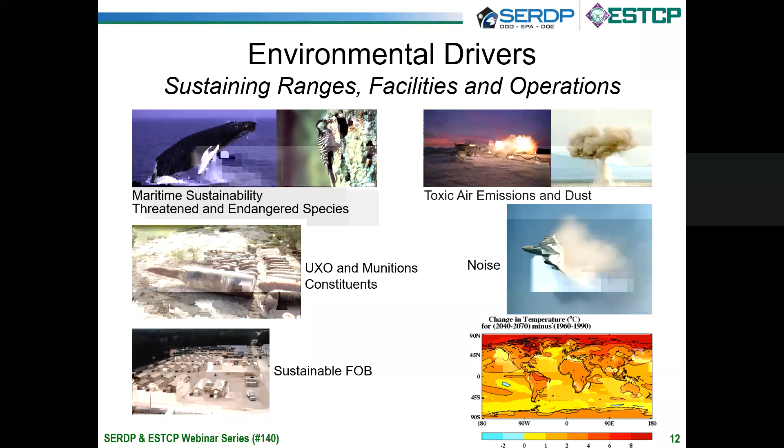We have a couple of drivers for the sort of work we fund. First is we are looking at the sustainment of our testing and training ranges, our facilities and operations, and this, as you can imagine, is very broad. It takes the form of looking at maritime sustainability, threatened and endangered species, climate impacts, unexploded ordnance and munitions constituents, as well as many other issues.

And then we also are looking at reducing current and future liability. Part of that is pollution prevention, where we're looking at the elimination of different pollutants or hazardous materials and their different operations on our installations. And then, of course, we also are dealing with contamination from past practices. This encompasses those chemicals in groundwater, soils, sediments. It also includes UXO liability. And then we're also always looking to the future in terms of what are emerging chemicals of concern that are coming out.

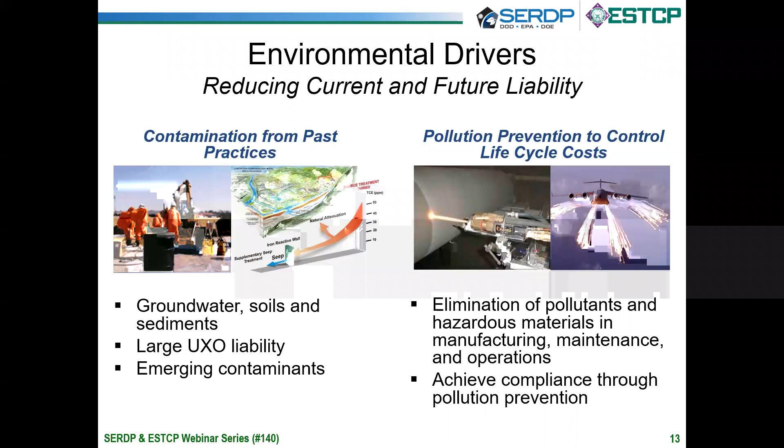We have several main focus areas shown here, and what I'm really going to highlight today is some of our work on PFAS and AFFF, which will be the topic of the presentations today.

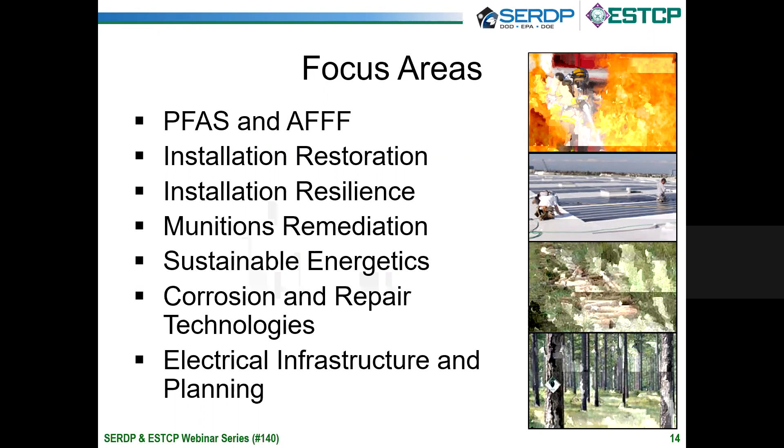Shown here is an overview of our entire PFAS and AFFF program, and I show it here really as a reference for you. We'll place the link to this website in the chat room in a second. This is an interactive graphic on our website, and above the date line shows all the different research areas that we've funded under SERDP.

Each of those research areas typically represents more than one project - it's a body of projects that were funded under that particular topic area. If you click on the box, it will take you to a page that shows more detail about what the research question was at that time, as well as the projects that were selected.

Below the date line, you'll see the ESTCP topics that were released. In this case, many of these are single projects, and you can also see that some are groups of projects by year. As we've progressed in our knowledge of PFAS, we've been funding more and more field efforts as well, so you'll see that in this graph.

Today we are focused on two different projects that came out of this program. It's a joint effort looking at a project dealing with PFAS treatment, as well as a project dealing with development of PFAS-free aqueous film-forming foams.

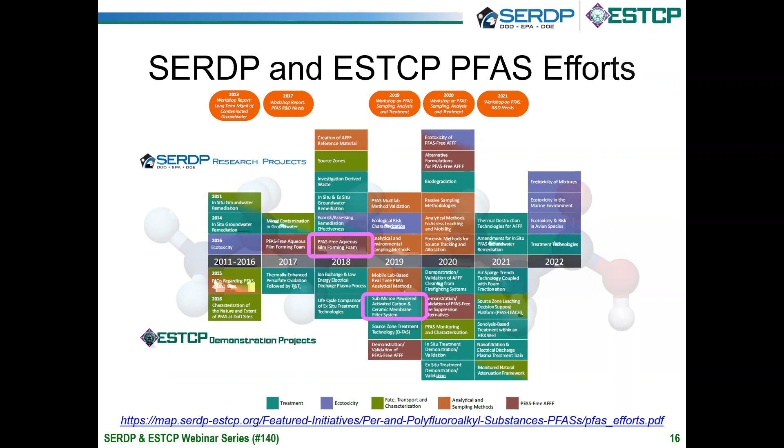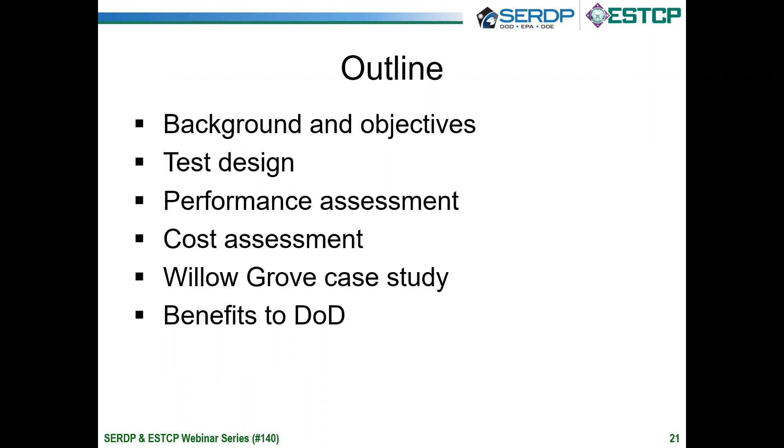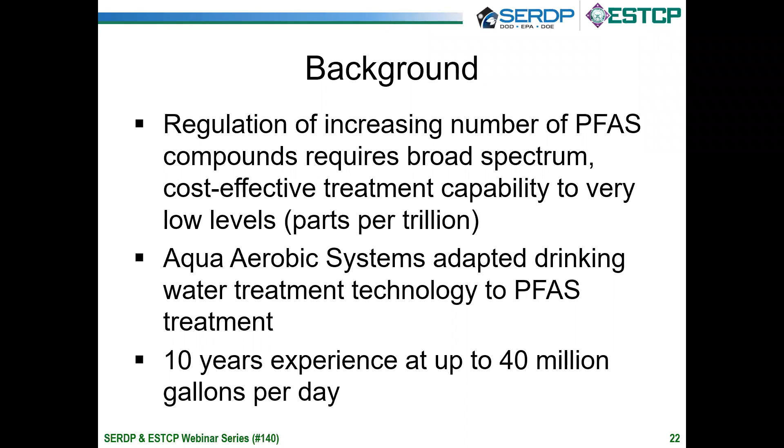Slide 22 covers the background of the submicron powdered activated carbon and ceramic membrane filter. It's a technology driven by increasing regulations of PFAS compounds and the need for broad-spectrum, cost-effective treatment capability at parts per trillion levels - that's really the big issue. Aqua Aerobic System, Terry's team, has adapted this technology from drinking water technology deployed in Japan. They've been using it on different contaminants for the last 10 years, in treatment applications up to 40 million gallons per day. So what they've done is taken this technology and applied it toward PFAS treatment, which is what we'll discuss today.

Slide 23 talks about our key performance objectives. We have three that we've met through our work at the Horsham Air Guard Station: treatment, longevity, and selectivity. We want to cost-effectively treat PFAS and make sure we can treat not only PFOS and PFOA, but a broader spectrum. To measure that success criteria, we're looking at those two compounds as well as the six compounds in the UCMR3 list, working to get below 70 nanograms per liter.

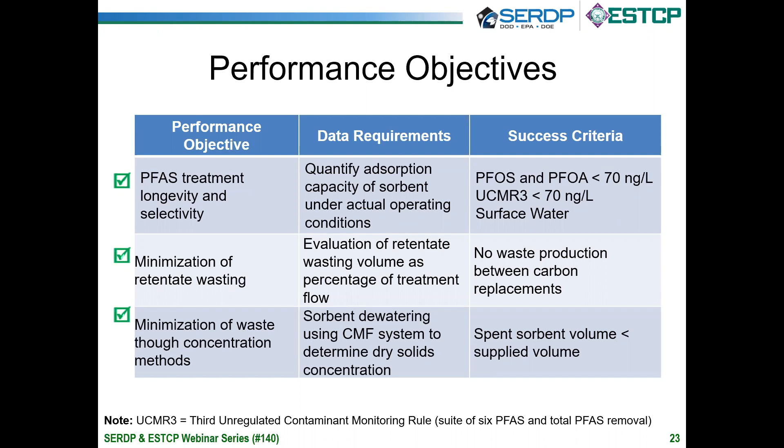Because the SPAC system uses a reactor, we're trying to minimize the retentate wasting for the spent SPAC, ultimately minimizing the waste. That last objective makes the technology very cost competitive by minimizing waste through concentration of the spent SPAC, dramatically reducing costs of waste management and disposal. Ultimately we're able to super-concentrate the SPAC after it's spent, leading to very cost-effective application. On slide 24, I'll pass the baton to Terry.

Thank you, Joe, and good morning, everybody. The results we're presenting today reflect testing conducted over a 12-month period starting July 2020. The technology centers around a carbon-based sorbent material we identify as Aqua PR206.

It's a superfine colloidal suspension managed in a slurry form. It's been generically termed superfine powdered activated carbon, or SPAC, but in this case it's been specifically formulated for the application we're about to discuss, and you'll see some differences between how it may have been used in water treatment versus what we're doing with perfluorinated compounds.

The general process flow of the technology is depicted on the right. Items 1 and 2 on the left-hand side are pre-treatment units - one a strainer, one a cloth media filter - used when drawing water with elevated sediment or suspended matter. Otherwise, if pulling from fairly clean groundwater, pump 3 takes the untreated water and pumps it to item 4, the sorbent reactor. That reactor maintains a suspension of the Aqua PR206 sorbent material anywhere from maybe 1 gram per liter up to 80 grams per liter, where the contact happens and the PFAS is adsorbed.

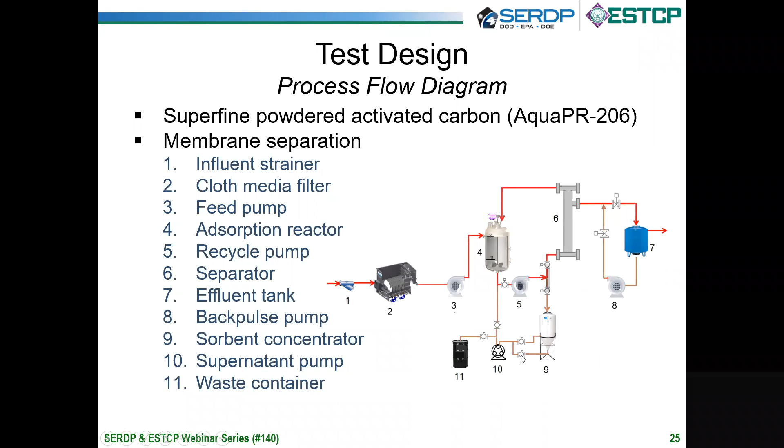The units shown on the lower portion of the screen, 9, 10, and 11, are used for concentrating the sorbent before disposal. Unit 9 concentrates the sorbent material; the water taken out of that is pumped back into the system for treatment. Meanwhile, the thickened sorbent is stored, and at some point ultimately disposed of, as depicted here with item 11.

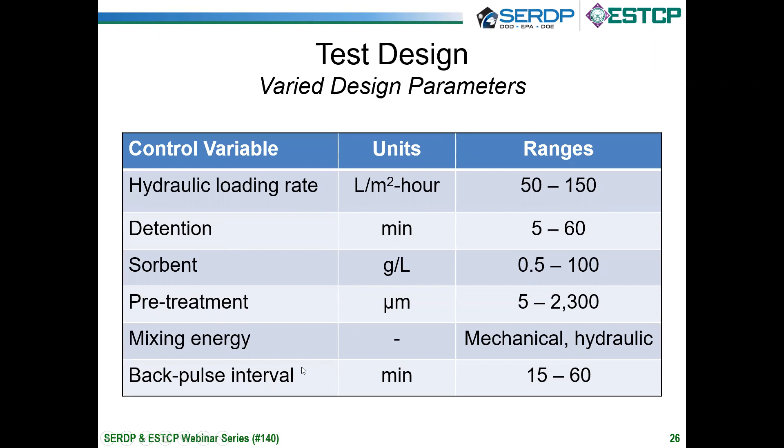Over the 12-month period, we performed over 26 different tests, and we looked at key performance indicators or variables that would influence PFAS removal, including the hydraulic loading rate to the system. Detention time was a critical factor, along with sorbent concentration, where we differ a bit because we're looking at anywhere from 0.5 to 100 grams per liter, not milligrams per liter. So this is a significantly concentrated material we're maintaining in that reactor. Up front, we considered pre-treatment and its impact on performance. We also looked at mixing energy and methods of improving performance, and finally the back pulse interval and how we can maintain reliability with the separation system.

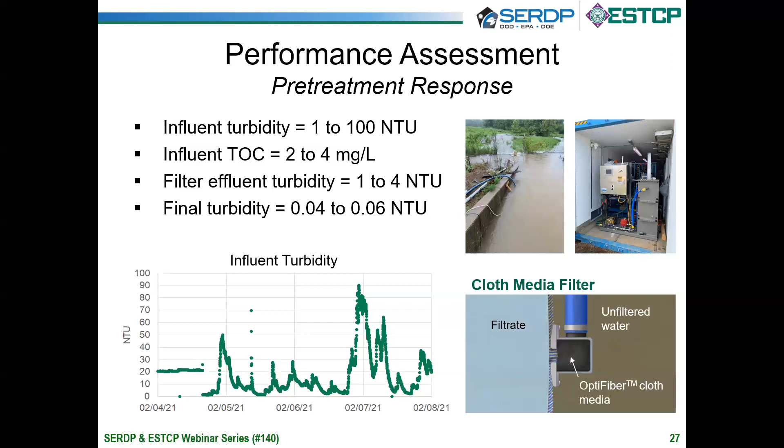We did evaluate PFAS removal across this system, and pre-treatment really had no impact on PFAS. So it was really an opportunity for us to optimize the performance of the downstream system. One thing to keep in mind is that because of this very tight separator at the end of the process, despite what's happening to the influent conditions, the effluent is pretty high quality in terms of final effluent, somewhere in the 0.05 NTU range.

And so we took this 26 tests and we grouped them into 3 different conditions. We'll start with test condition A, which is a single pass operation. We're moderately high on the hydraulic loading rate, but more importantly, we focused on a short detention time, in this case 5 minutes, and a moderate concentration of sorbent of 40 grams per liter. Moderate being something that could be as high as 100 grams per liter.

This is the characteristics of the feed water over that test period. The total PFAS was about 8,000 parts per trillion, predominantly made of PFOS.

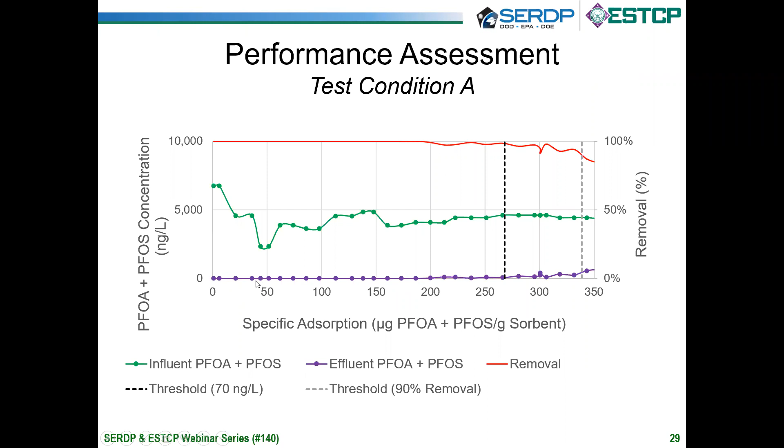What's interesting is that we were actually able to load the sorbent to about 260 micrograms of pollutant per gram of sorbent before we reached the 70 part per trillion combined PFOA, PFOS level. Now, in comparison, and putting this in context, what we would have expected for granular activated carbon would have been down in this 6 to 10 microgram per gram range. So we indeed were seeing significantly higher adsorption rates in this testing.

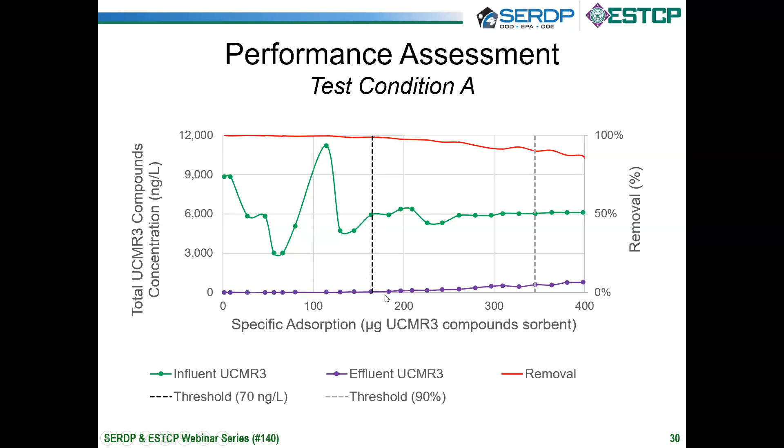But more importantly, as Joe mentioned, we were looking at broad spectrum removal of larger components and smaller chain compounds like PFBS and PFHxS. So we identified the UCMR3 compounds, those 6 compounds, as a good surrogate to identify how well the system was doing. In this test condition A, the concentration was somewhere between 3 and 10,000 parts per trillion, but averaged about 6,000. Again, we were at very low levels throughout the testing, not reaching 70 parts per trillion of combined UCMR3 until about 160 micrograms per gram. Meanwhile, if we looked at 10% breakthrough, that was closer to double that value, which shows us that we're not seeing a rapid drop-off in performance after we've reached a certain endpoint. So it's kind of a subtle change.

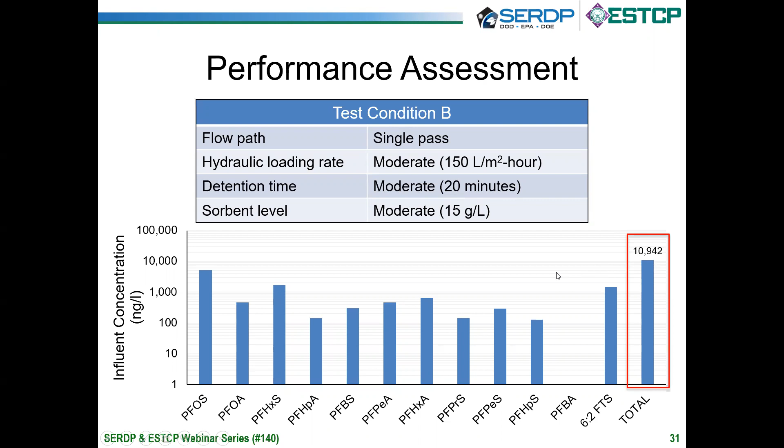So for test condition B, we made some changes. We looked at a longer detention time but a lower sorbent level. In this testing, we had slightly more stable feed quality conditions, but a little bit stronger, at nearly 11,000 parts per trillion. Looking at the combined PFOA and PFOS, the concentration was pretty stable at about 6,000 parts per trillion.

As a result, most of the samples were below the limits of quantification, up to 400 micrograms of combined PFOA and PFOS per gram of sorbent, where we hit the 70 parts per trillion level. Unfortunately, or fortunately, we terminated the test a little bit too early because we didn't see the 10% breakthrough point on the combined PFOA and PFOS.

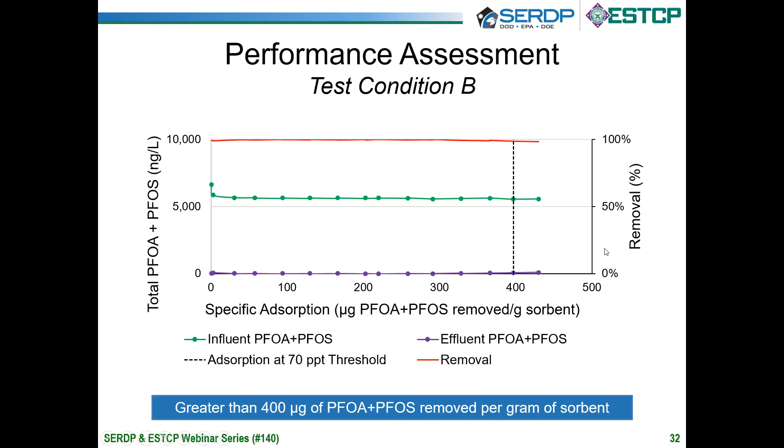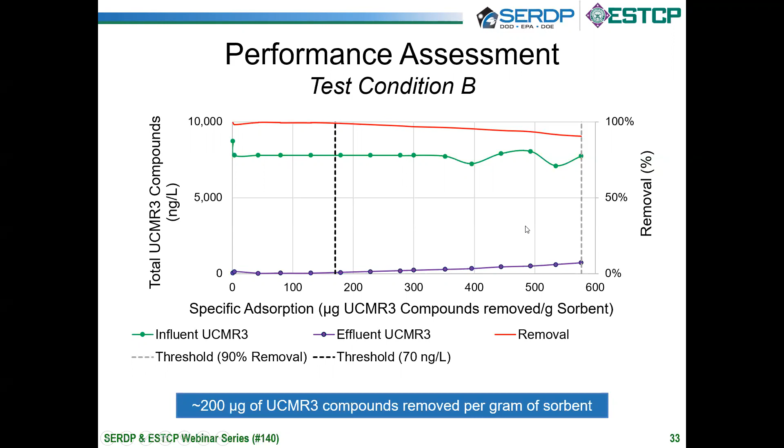So test condition C, during the final portion of the study, we ran a series of tests in a different configuration. It was in series, where we used 2 units, both with a short detention time of 5 and 7.5 minutes, at moderate concentration of sorbent. The objective of this testing wasn't necessarily to demonstrate high absorption rates, but to replicate practical application in the field, where we'd run 7 days.

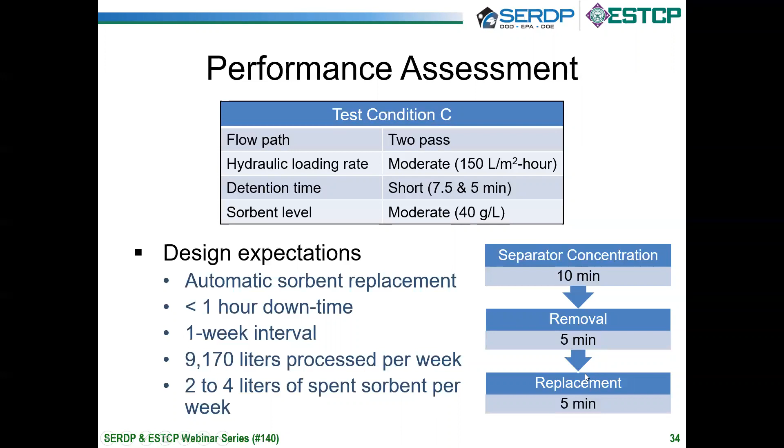Rather than waiting months to get to exhaustion, we would operate for 7 days and replace a little bit of the sorbent material. At the end of those 7 days, because it's a slurry, it allowed us to do some things with concentrating. So we would take the system, run it continuously for 7 days, and at the end take the system offline for about half an hour, where we would concentrate the sorbent, remove it, replace it, and put the system back online.

In terms of performance over the 7 days, this graph is pretty much the same as we saw before, except we're looking at the 7-day operation. The UCMR3 compounds were about 5,000 parts per trillion and below limits of quantification throughout most of that testing. We started to measure some towards the end of that 7-day period, but got nearly 100% removal over that time period.

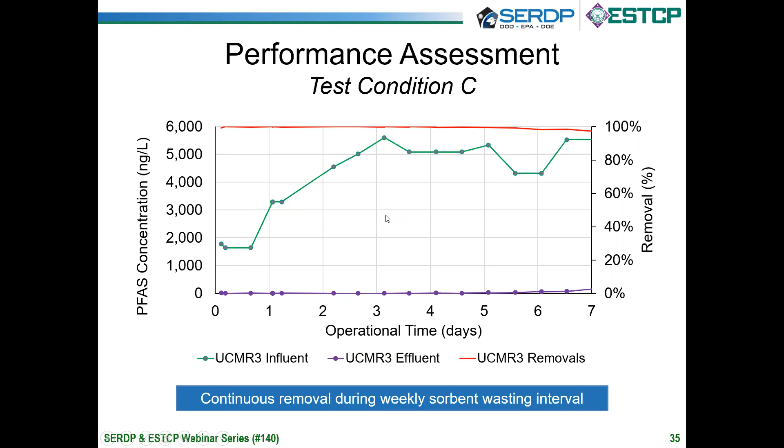And so that was interesting from a performance standpoint.

However, we wanted to compare, as Joe mentioned, part of the program was to evaluate the economic considerations of the technology. In this upper graphic, we used the data gathered from testing at the Horsham Air Guard Station, and then ran a rapid small-scale column test on granular activated carbon on the same water. You'll note this is on a log scale, because if we used a regular scale, we wouldn't see the GAC absorbent rate.

As a result, what you see is that the absorption capacity of the superfine powdered activated carbon is orders of magnitude higher than what we saw for GAC. This pretty much mirrored what we saw in the literature, in that range of 2 to 3 micrograms per gram based on this particular water quality, where we were upwards of 2 to 300. This is based on the 10% breakthrough point.

So what is the ratio of the two? If the aqua PR 206 absorbent material and the granular activated carbon were equal, that ratio would be 1. So we looked at each of the 6 UCMR3 compounds and took the ratio of the absorbent capacity, and what you can see is that most of the compounds were at or above about 100 times increased performance capacity with this superfine absorbent material. In fact, the sum of all the compounds was close to 300 times greater than what we saw with the granular activated carbon.

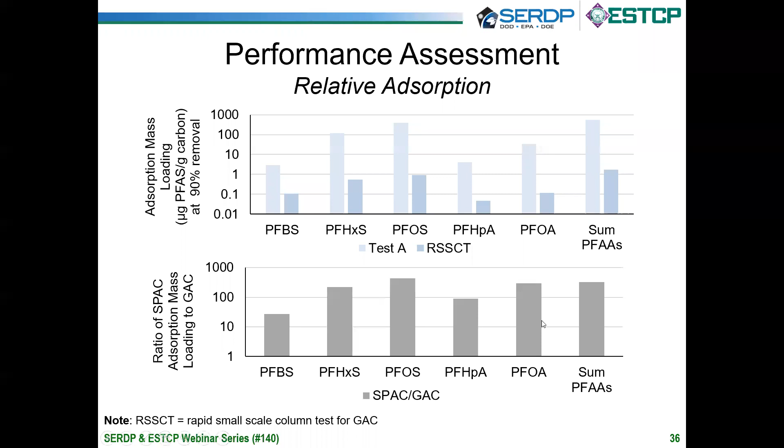There's one compound missing, that's PFNA, which was not actually measured in the influent, so we didn't include it in the graphic. A big part of the performance as well is waste minimization.

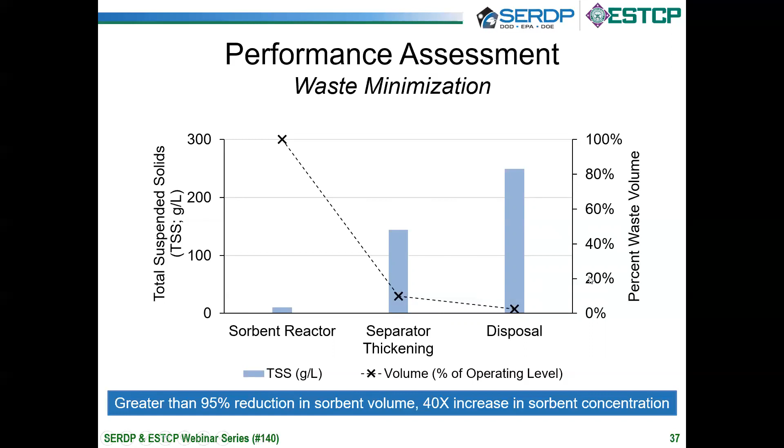This technology has a head start because the absorbent capacity is a couple hundred times greater than what we see for GAC, so we start with a much smaller amount of absorbent material. As we operate the system, we maintain a certain concentration in the reactor, but that's not what we actually dispose of at the end of the week. What we do is go through some thickening to the extent where what we're actually disposing is about 5% of the volume we're maintaining in the absorbent reactor. So we're really trying to limit the volume and mass of what we're disposing from the system, and that plays into the economic considerations pretty heavily.

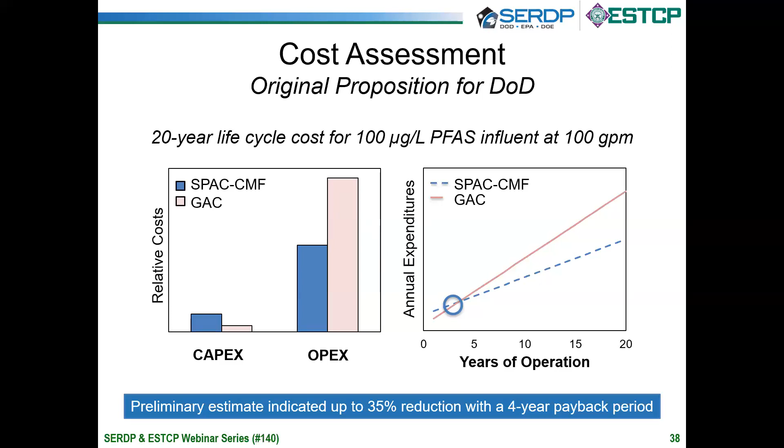Before, in the proposal stage to the ESTCP, we put together what we felt were the benefits to the DoD with regards to the technology. We looked at the capital expenditures we expected for this superfine powder activated carbon system versus what we would expect for granular activated carbon. We had increased capital cost by a factor of 2 to 3, but we felt the savings in operation and maintenance would pay for that difference in a short amount of time. In fact, in the evaluation of a 20-year life cycle cost, the payback period was about 3 to 4 years with this technology, based on a fictitious water using some estimated absorbent ratios.

So our goal was to, over that 12-month period, take the actual data we've compiled and compare it to the actual data gathered for granular activated carbon, and using the Horsham data, repeat that economic analysis.

When we look at the capital costs, not much change there. Our system is still a little more expensive from a capital standpoint, but a couple things happened in the operation expenditures. First off, our absorbent material performed a little better than what we proposed, and the granular activated carbon, I think in our proposal stage, we gave it a little too high an absorption rate. So this difference grew, resulting in a significantly reduced operation cost that produced a payback period of somewhere in the 3 to 5 months range, as opposed to 3 to 5 years. Again, this is based on the data we've been gathering over the last year.

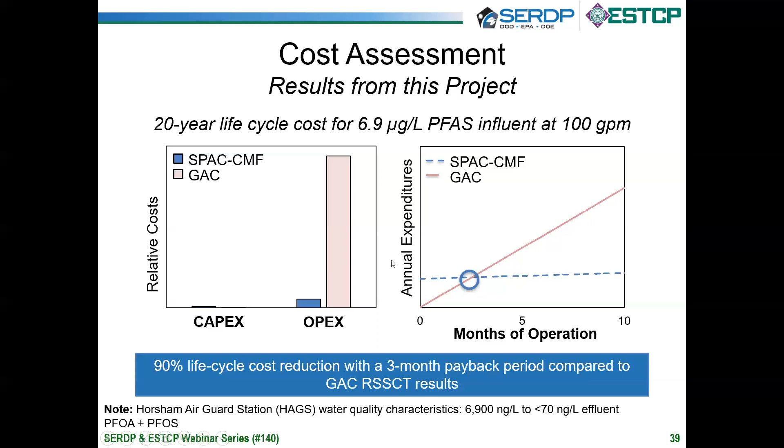As Joe mentioned, towards the end of the study, we had an opportunity to redeploy the system to the nearby Willow Grove Naval Air Station, where we could see how well the technology performed on groundwater as opposed to surface water.

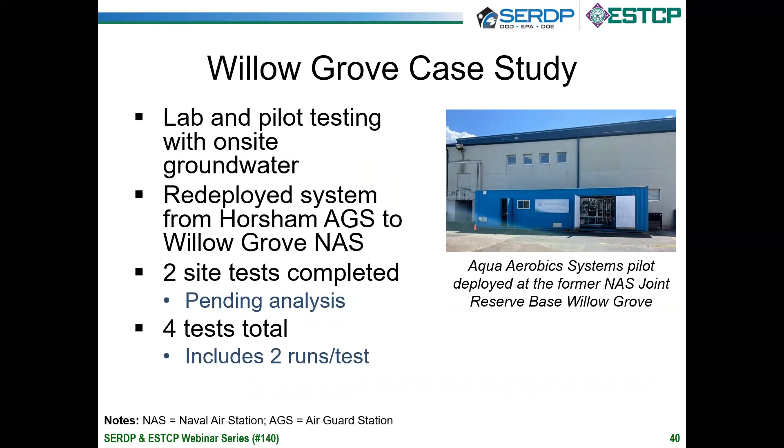One of the main objectives was to recognize that we're using the same production level absorbent, the same production level separator, and the same process flow diagram. What that would allow us to do in the lab on a short-term basis is have an accurate predictor of what to expect in the field.

So before we got on site, we actually received some water samples from Horsham, or from Willow Grove, and performed this testing in the lab. We found that the combined PFOA and PFOS was about 37,000 parts per trillion, and we were able to knock it down below the limit of quantification for the most part, up to about 1,200 micrograms per gram. That was 3 to 4 times higher than what we saw in the surface water.

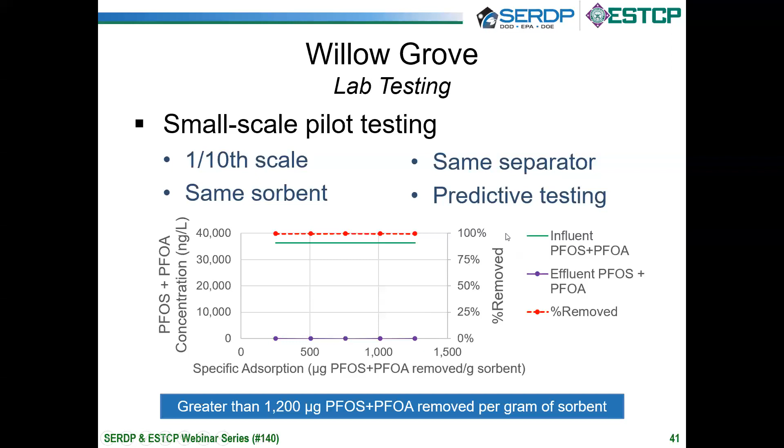So now the next step is to put units on site and see if that came true. We set up the first two tests in a similar fashion to what we did at the Horsham facility, with a moderate hydraulic loading rate. We used 2 units, one with 10 minutes detention and 20 grams per liter, and one with 20 minutes detention and 10 grams per liter. So same mass, just different detention times.

This is the makeup of the water that we saw during the testing, with total PFAS levels of 40,000 parts per trillion, predominantly PFOS.

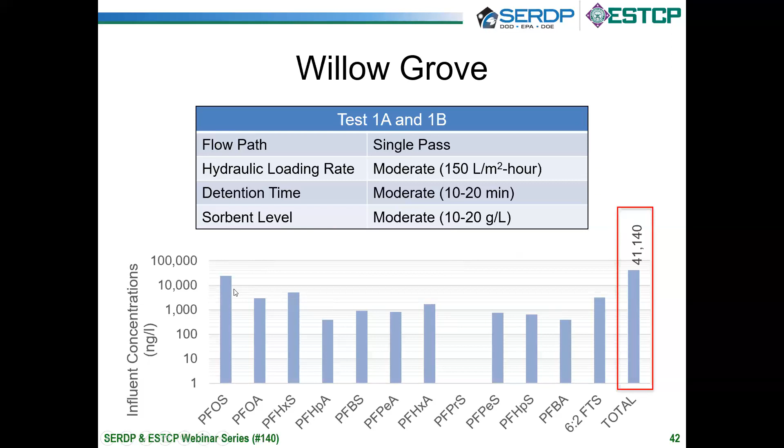We actually never saw any samples go above the limit of quantification. I suspect that had we had more sample, this would have been closer to the 1600 mark.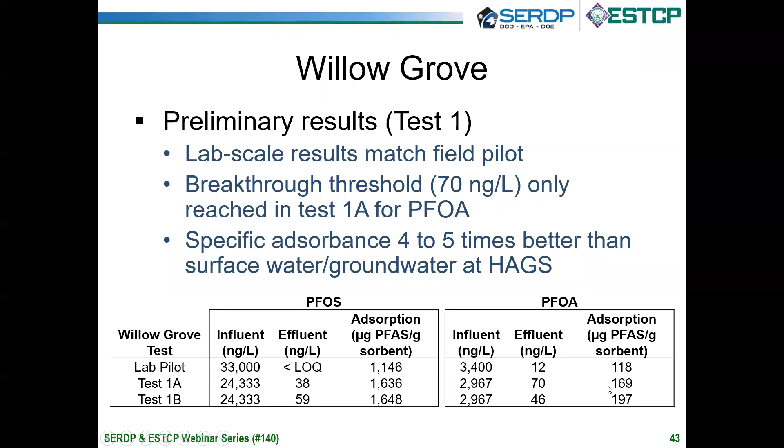PFOA, a little more difficult to remove, but at much lower concentrations. We had a similar story between 3,000 and 3,400 parts per trillion, down to less than 70, at adsorption rates of 170 to 200 micrograms per gram. And again, these were 4 to 5 times higher than what we're seeing in the surface water.

So in conclusion, the Aqua PR206 superfine powder activated carbon is superior to granular activated carbon. It's orders of magnitude more adsorbent than what we would see with GAC.

More importantly, in terms of what benefits it offers to, in this case, the Department of Defense, it offers significantly lower disposal and replacement costs where the operation expenditures are less than 10% of what we'd see with granular activated carbon. But some other side benefits is that it's an automated process that we ran by and large remotely.

In terms of absorbent replacement, we were able to do that in less than an hour and closer to maybe 30 minutes. Because it's a slurry, it allows us to use pumps, valves, and tanks and controls to replace the absorbent material automatically. And then a side benefit as well is because we're using that robust separator with a 0.1 micron barrier, that the effluent quality coming out of that is quite good.

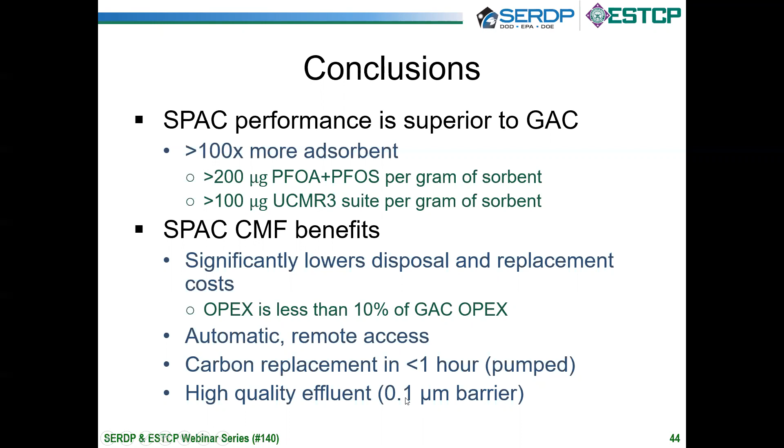So that concludes the presentation.

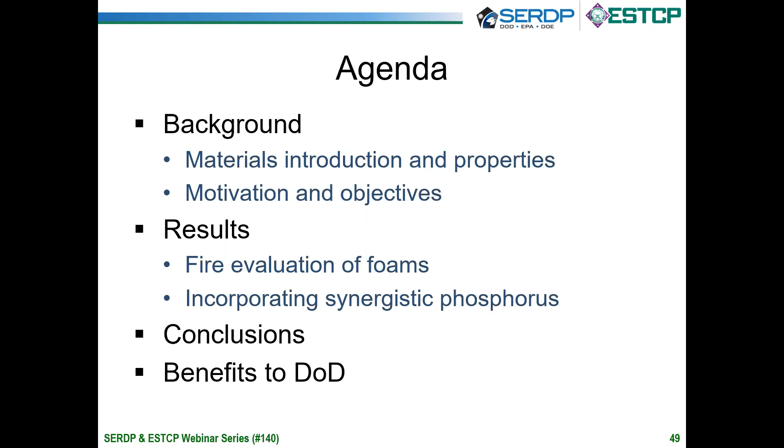I'll also show you some results of the polymers we designed, and we'll look at, in partnership with others, the fire evaluation—how do they perform? How do we scale the polymer up, and how does it actually put out a fire? That's really the key metric—at the end of the day, that's where the rubber meets the road. We also want to look at some other synergistic design parameters—what strategies can we take, what are some universal ways to think about the design of next generation fire suppression foams? So I'll conclude, and then I'll describe some of the benefits to the DoD.

So the first strategy that we chose was a polymer one, right? And again, as Jennifer mentioned, I'm a director of a polymer center here at Arizona State. So our first thinking is that, wow, polymers can solve this problem, right?

And the polymers that we choose were actually based on some earlier research, and we chose a fully aromatic polymer. For people who aren't chemists, in the yellow box, these are polymers that only contain these aromatic rings. In this case, this is a polyimide, and polyimides are really well known in commerce and commercial applications. The DoD, NASA, others have used polyimides for a variety of high performance applications - aerospace, automotive, medical, electronics.

Why are all these applications taking advantage of polyimides? Well, it's this fully aromatic character - it's all these kind of benzene rings that comprise the main chain of this polymer.

These polymers are also recognized for being flame resistant, fire resistant. Why is that? Well, they're fully aromatic, so they're not going to burn like octane, for example. So these fully aromatic polymers are recognized for their resistance to fire - they're flame retardant inherently in their chemical structure.

They're also resistant to chemicals - these molecules tend to be completely insoluble in organic solvents. And in addition to this resistance, they're also mechanically robust, and they have exceptionally high temperature stability, some of the highest temperature stabilities that are known in the polymer field.

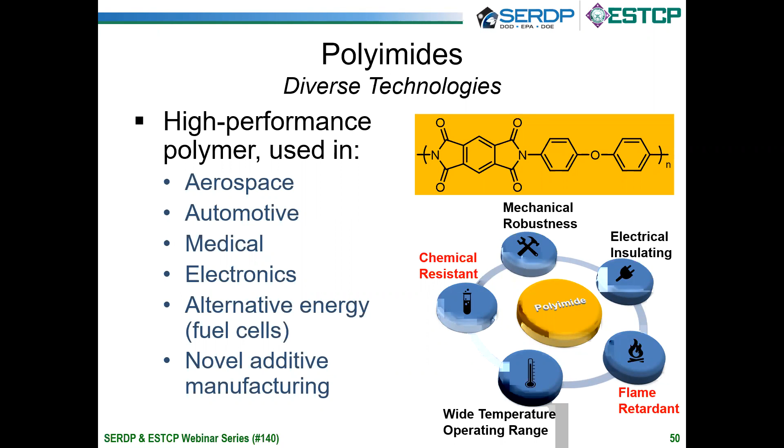So we're going to talk a little bit about the polyimide design space and why we chose them, and what are some of the potential advantages of a polymeric foam.

So the objectives for my lecture are first to show you how do we make a polymeric surfactant. What do we need to do? What are the considerations from the chemistry standpoint or from a scale-up process at a commercial scale? We're going to be looking at fully aromatic or all aromatic polyimides, and I'll show you a little bit more of that structure again - not to drill down too deeply into the chemistry, but to give you a sense of why we're choosing these, and maybe some of these approaches can be extended to other systems.

We also want to demonstrate an idea of cross-linking. As we suppress a fire, one of the major challenges is to not let any fire foam suppression agent migrate into that waterway that we just looked at. How do we do that? Well, polymeric structures are going to be less diffusing, and polymeric structures have high molecular weight by definition.

So we're going to talk about even cross-linking, or during the fire itself, using the fire to induce even a higher molecular weight or a less propensity to migrate.

And we're also going to explore various pendant sulfonates. We're going to look at the sulfonate group, and sulfonates, as we'll see, are widely used in surfactants - that's the S that we're all very comfortable with. But how we place those onto a polymer structure in order to impart foamability and tailor that fire performance - that's really the challenge of some of the efforts together with SERDP.

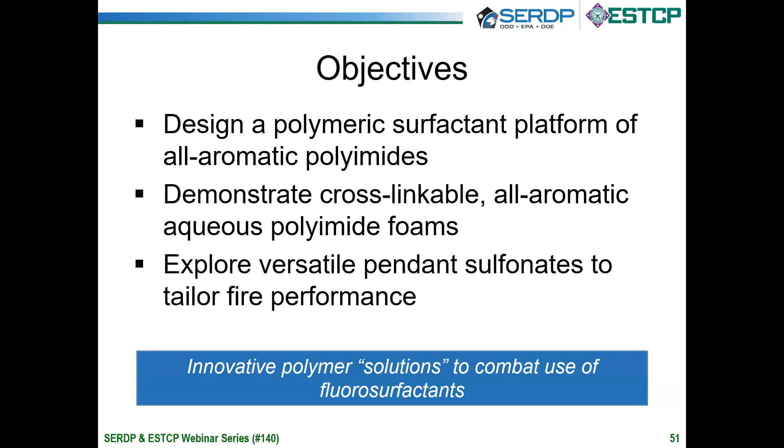Now, these properties are fantastic, but they're not going to form a foam - they're not going to be dispersible in water, form a foam in water. So we immediately have to take this idea of a high performance polymer that forms incredible char upon burning, and no migration - how do we render that polymer soluble or dispersible or foamable in an aqueous medium? So typically the way we're going to do that is we're going to introduce these sulfonate groups.

The other important feature for polyimides is the fact that they form high char yields. What's a char? After we heat that up, do the molecules all vaporize upon heating, or do they essentially form a high molecular weight carbonaceous char that also serves to help suppress the fire or to suppress any type of oxygen ingress into that system?

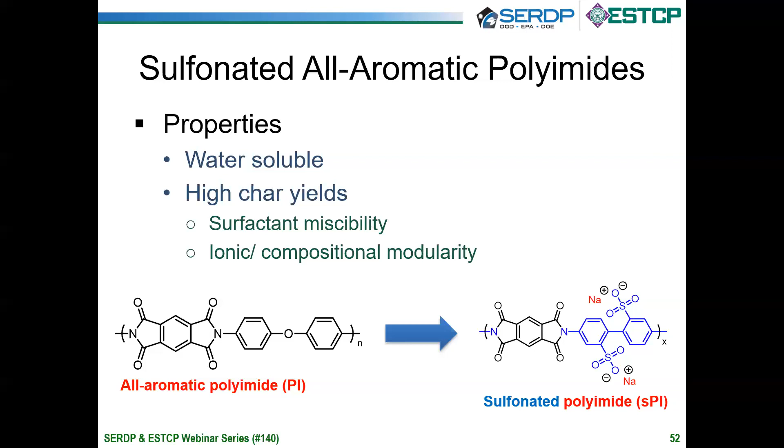So highly aromatic polymers have been widely used in aerospace applications, automotive applications, for these very reasons. But they have not seen use in the suppression of fire and foams. So let's get into a little bit of that kind of technology together.

The first thing to do is to leverage a commercial process. Even though SERDP is dedicated to fundamental science and engineering, looking for fundamentally new solutions, we still want to have a lens of commercial impact or commercial viability. So the first thing we did was to demonstrate that these polyamic acids, or this PAA, can be easily synthesized at room temperature. Why is this important? Well, we want to make these molecules in a commercially viable way, not using a lot of energy, and we'd like them to be affordable.

And then what we need to do, and what DuPont and Sabic do, is they imidize this structure at very high temperatures. At first glance you're going to say, wow, that doesn't seem very feasible, we're heating to 400 degrees C, that can't be a commercially viable process. Well, it is - there's many products based on that approach, but we're going to remove that constraint a little bit later in the lecture and show that now we can look at materials that are much more easily manufactured at scale.

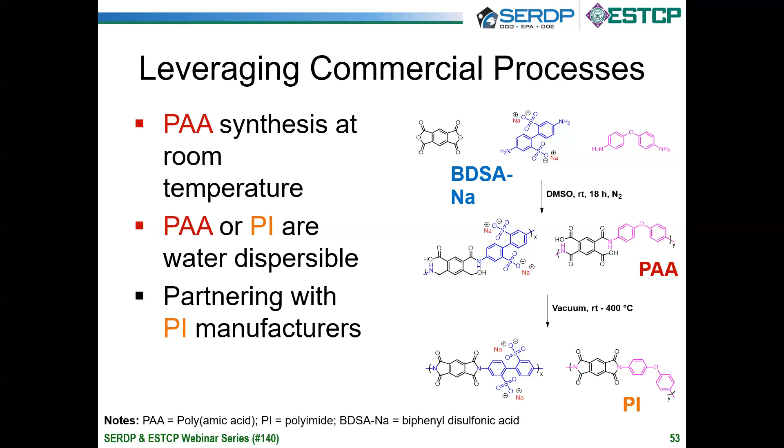So the main message for this particular onset of our strategy was: let's take advantage of fully aromatic polyimides, but let's also take advantage of existing infrastructure commercially in the United States. Let's take advantage of reactors that exist and processes that exist so that we can actually translate this technology into a commercial product, one that the DoD and other agencies can use.

We also like the char because we don't want small molecules coming out of the foam. So we prefer, as we see high temperatures in the foam, that these molecules are essentially tied into a carbonaceous product at the end of the day, and they're not vaporizing into the air and potentially harming people that are around that fire scene.

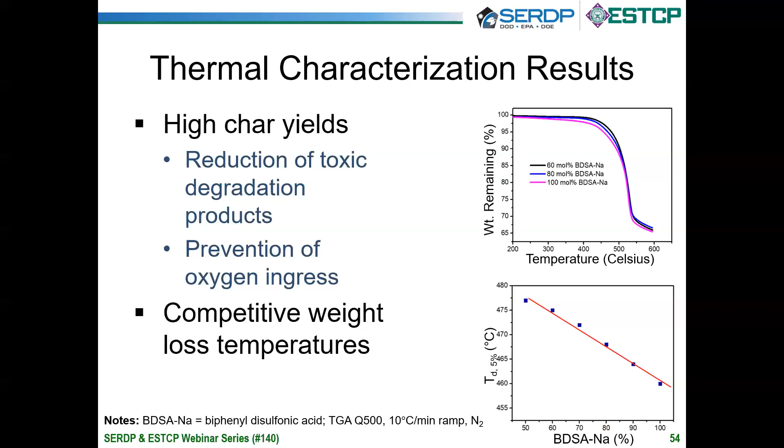So we're not compromising the thermal stability of these polymers despite introducing hydrophilicity and dispersibility into an aqueous media. That's a really good, promising result for us.

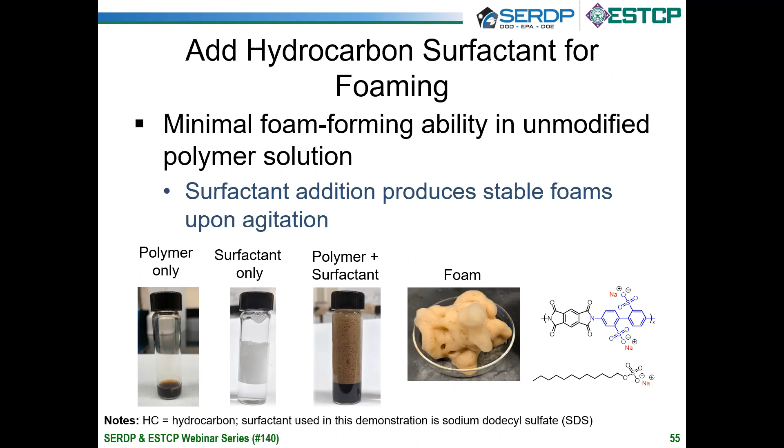But these form very nice foams at the concentrations that are typically used in firefighting, and we'll talk about that in a moment. These foams are stable. We can look at them. They can sit on the bench top, and they form quite readily. So that's a really good metric for success in this initial screening kind of exercise.

We can also spend a lot of time looking at the foam, and I don't think a lot of people are doing this. This is an area that SERDP has been encouraging: to fundamentally understand what is the foam, and how does the foam microstructure influence fire suppression. Lots of really critical fundamental questions in that space.

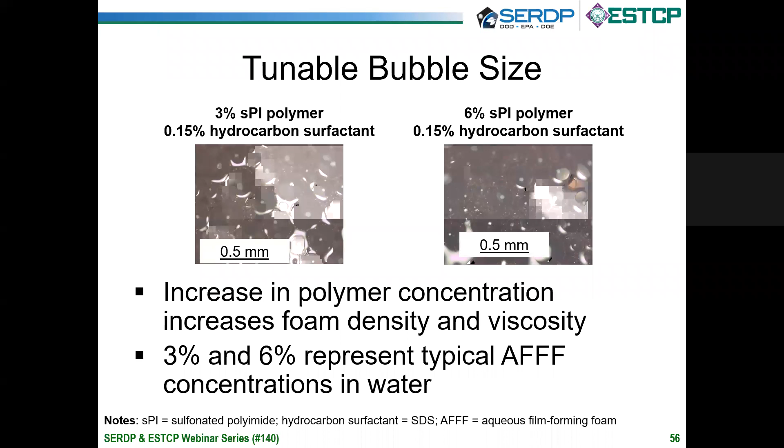What we also showed is that at the 3% and 6% levels, which is very typical for an AFFF kind of solution concentration in water, these will form foams. So we don't need to use more. We probably could use less, but at this early stage of research, we want to demonstrate at least that we're meeting the benchmarks of current products.

So let's test the foam. What's the biggest challenge in that? Making enough of that polymer to test. So in collaboration with Jensen Hughes, fortunately Brian Lattimer at Virginia Tech, great colleague and a former employee at Jensen Hughes, is on our team.

We can take a scaled-up production of these sulfonated polyimides and spray them onto this vertical substrate, and we can look at expansion ratio and drainage time. What we discovered was that, using this mil-spec nozzle and these mil-spec specifications, we could reach them—we're in the right ballpark. The biggest challenge here for synthetic chemists or people working in the laboratory is making it at scale.

And again, why did we go with those commercial processes? We did that to make these at scale, because we knew down the road we can't make milligrams of a product—we need to make hundreds of grams of a product, which is critical if we're going to translate this technology out of the lab. But you'll see the maximum drainage time down that vertical substrate.

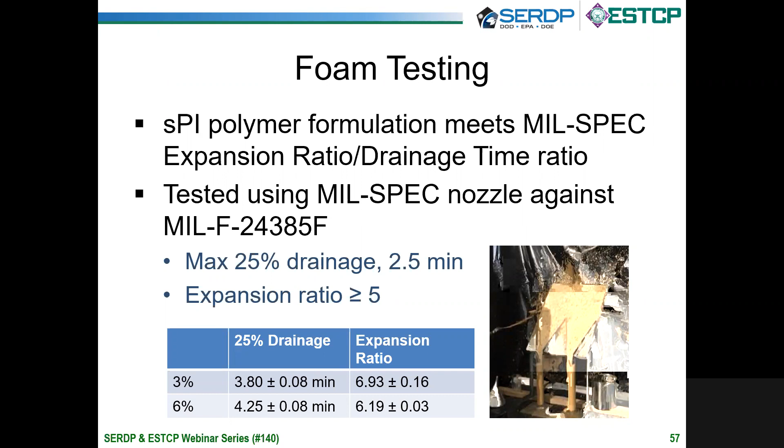You'll see the expansion ratio greater than 5. Those are the specifications, and you see that we're kind of in the ballpark. We're getting performance, and that encourages us to move forward on that.

So how do we go farther in the last 7 minutes or so? We're gonna take this idea and make it even easier. And how do we do that? Well, let's eliminate that reaction at 400 degrees C. DuPont, help us out and make this molecule, but let's do it all at room temperature. Let's not heat this up at all.

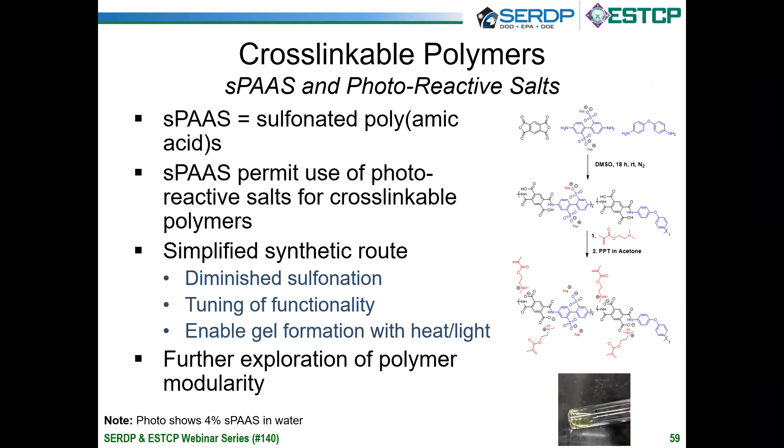Really what we're after in this approach, as we go down from this step in the middle and introduce that red molecule, is to do everything at room temperature. So synthesis and commercial scalability-wise, this is really much more feasible. This simple approach allows us to more quickly access those larger quantities of material that we want to use to get into some real testing and further exploration.

The other thing to demonstrate is that we want to show that those red cross-linkable sites, those acrylates, are in fact cross-linkable. And this is possible. We're looking at the modulus of the foam, the stiffness. So these sulfonated polyamic acid salts, or sPAAS, are enabled to cross-link upon heat or light. The modulus is easily measured.

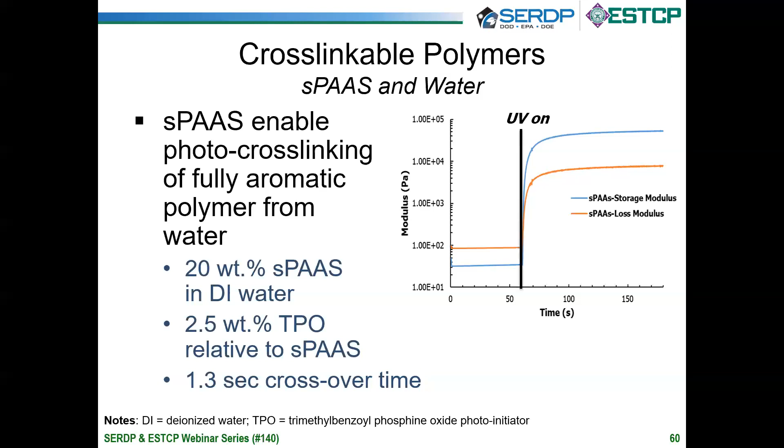We have rheometers that can be imposing a light source from the bottom. We can watch the stiffness of the foam change as a function of irradiation, and we can actually demonstrate that these polymers, these foams, will essentially increase their modulus and their stiffness. In essence, what is the mechanical properties and the microstructure of those foams, and how do those fundamental structural elements influence the performance in fire suppression?

So we also did a fair amount of small-scale fire suppression. I have to use that word 'we' very generously because this is in partnership with Jensen Hughes, looking at screening these foam formulations using test protocols such as 2 gallons per minute foam applied to the classic 28 square foot fire. So we're looking at a pool fire. We're basically introducing the foam to that planar substrate, and then we're looking at suppression, extinguishment, and burn back. We'll talk about how these foams are behaving under that set of criteria.

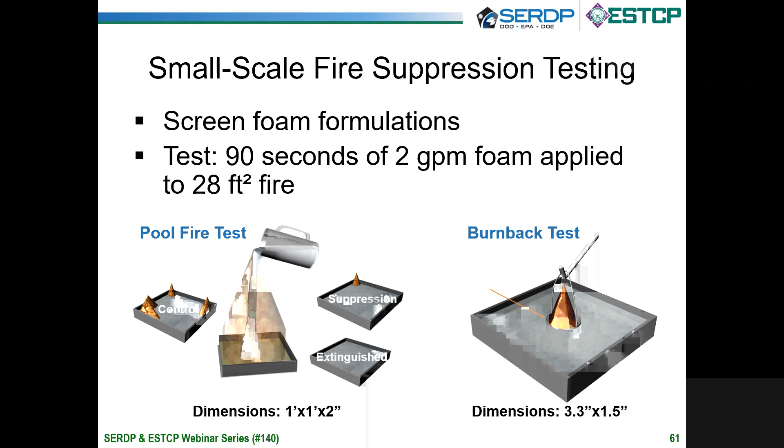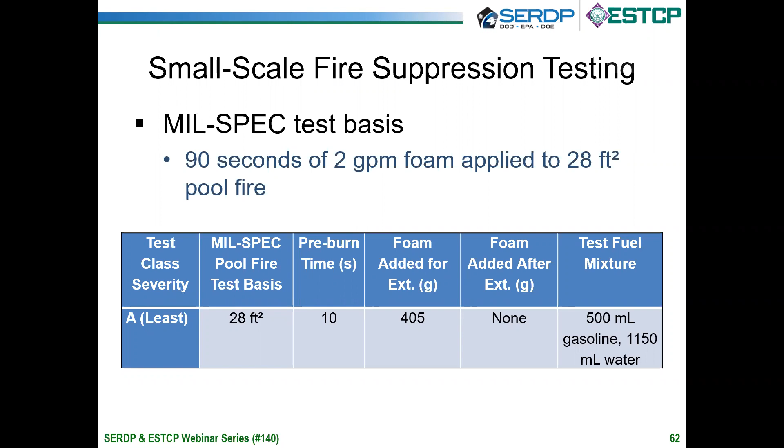Again, for people who have not done these experiments before, I'm sure there's many in the audience who know more about this than I do. But these mil-spec testing protocols are summarized here for us. I just spent a good week up in Minneapolis looking at a variety of these different testing protocols. These are some standard metrics and experiments that people in the field are using to evaluate these next generation foams.

These foams will cross-link, and here you can see when exposed to radiant heating, the foam is suppressing the fire. You see some flamelets over on the corners and edges, but that foam is being introduced to that surface. This is a foam where the polyimide has been made at room temperature, commercially viable. The acrylates are cross-linking, and we're beginning to see really nice suppression of these tested foams.

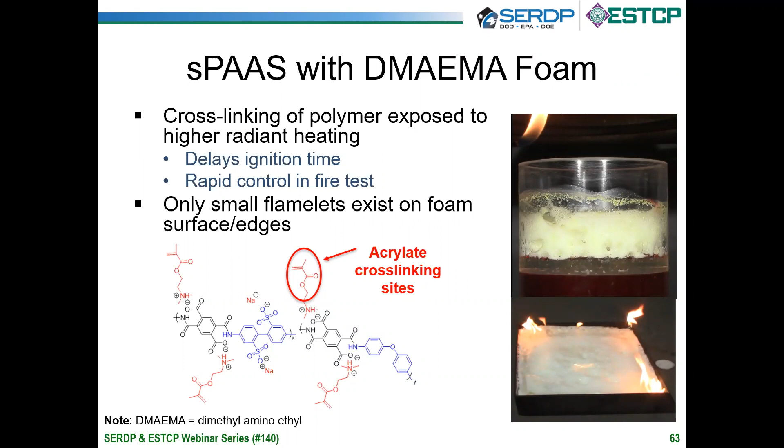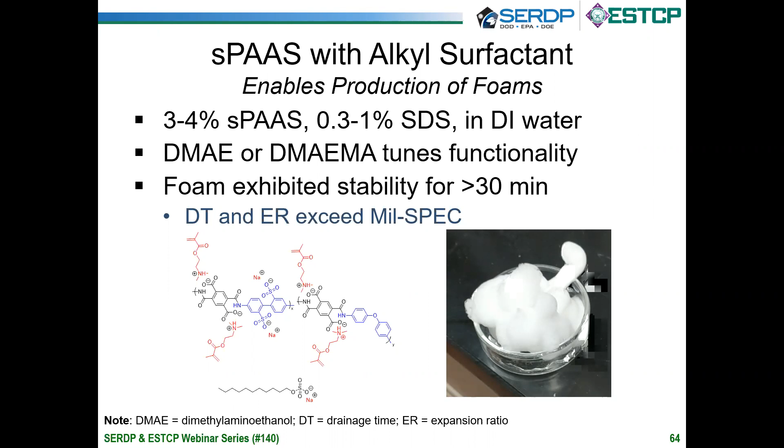We also introduce alkyl surfactants together with these sulfonated polyamic acid salts, like we saw before. We have further modularity - in addition to introducing those acrylate groups, we can introduce groups that make the polymer more water dispersible, and we get excellent foam stabilities - greater than 30 minutes, with drainage times and expansion ratios exceeding the mil specification. These are also forming quite beautiful foams. You'll notice the color of the foam is much suppressed. So we've made a lot of progress in understanding how to prepare these.

We've demonstrated that mixtures of the water dispersible polyimide and these salts, containing water dispersible cations, are suppressing fire. You see the amount of foam necessary to do that, and the amount of time - 25 seconds to take that planar 28 square foot fire and suppress it using the foams just described.

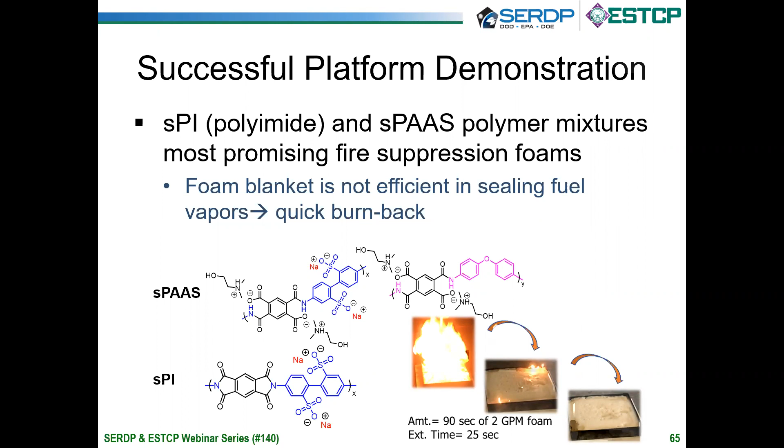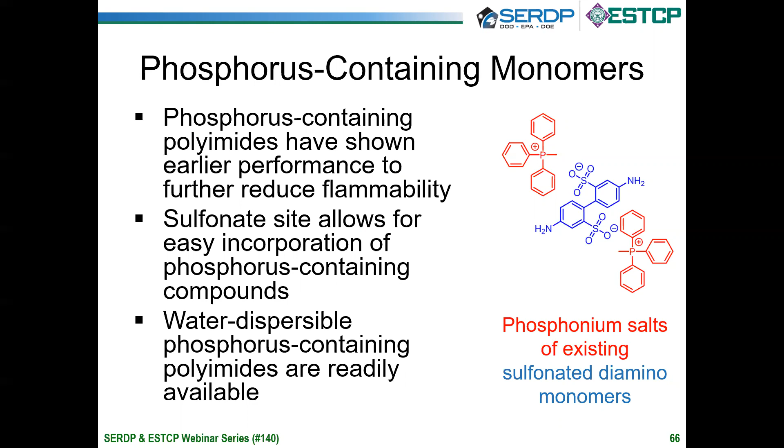So in the last couple minutes, as I conclude, what's next? We continue to look at the modularity of a polymeric amphiphile, a polymeric foam, as opposed to a PFAS or PFAS-type small molecule. We can also introduce phosphorus to the sides of these groups, and it's well known that phosphorus containing polymers have excellent fire resistant and flame resistant properties. So we continue to further enhance the performance of these polymeric polyimide foams, to increase their dispersibility and their performance in suppressing fire.

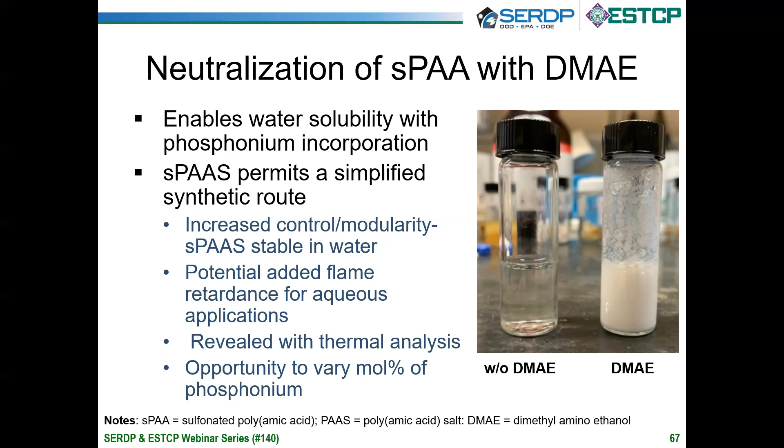We continue to do this - we're looking at new ways to neutralize those sulfonated polyamic acids, ensure good water solubility and dispersibility, keep this synthetic process simple and modular, and make the learnings we come up with adaptable or extendable to the many other researchers trying to tackle this particular problem, in partnership with SERDP.

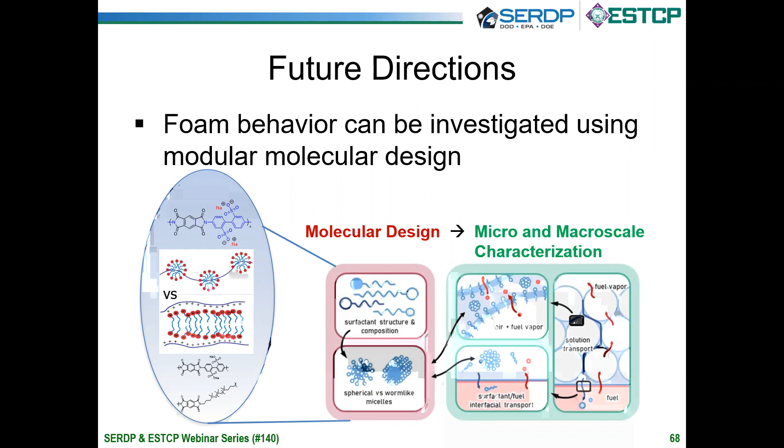In the last couple of slides, on future directions, we continue to look together with Brian Lattimer at Virginia Tech at the influence of the foam itself - what is the foam microstructure, what's the pore size, what are the diffusion mechanisms and permeabilities of these organic vapors through this complex foam structure. Thanks to SERDP for supporting these fundamental investigations, because at the end of the day, I think this is what it's going to take to tackle this big challenge that has been presented to us.

And we've begun to do that. We can look at the design of surfactants, continuing what we discussed today - what is the modular strategy, what are the different design parameters we can use, and how do those design parameters translate to properties and performance of a foam. So we continue to do that.

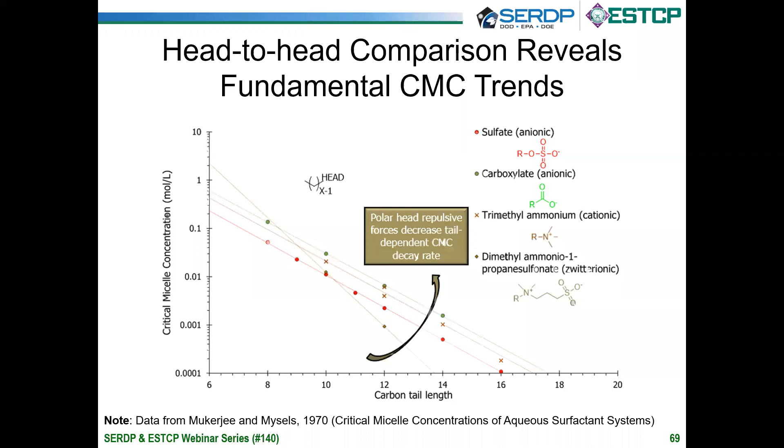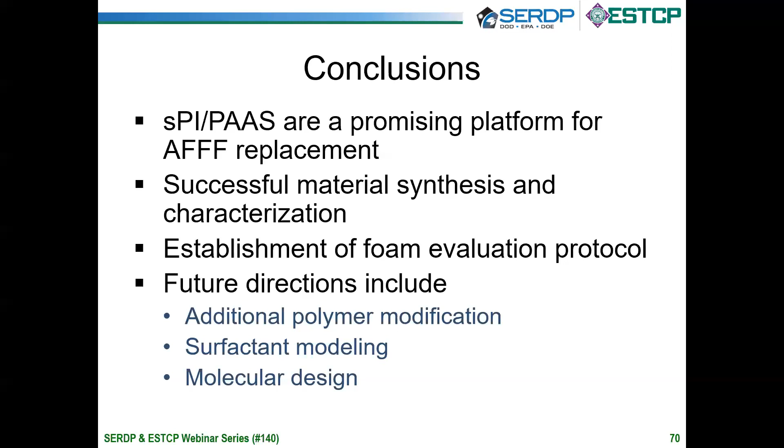So let me conclude my lecture - I think I'm just about on time. I've tried to show you a fairly promising platform for an AFFF replacement. This is, I think, a paradigm - we're using a polymeric sulfonated polymer. We can synthesize these at commercial scale, characterize them at the lab scale, and establish some of their performance using standardized testing like the mil-spec specifications. We have future directions that I've described, where we continue to put together a structure property performance relationship that will guide the future directions.